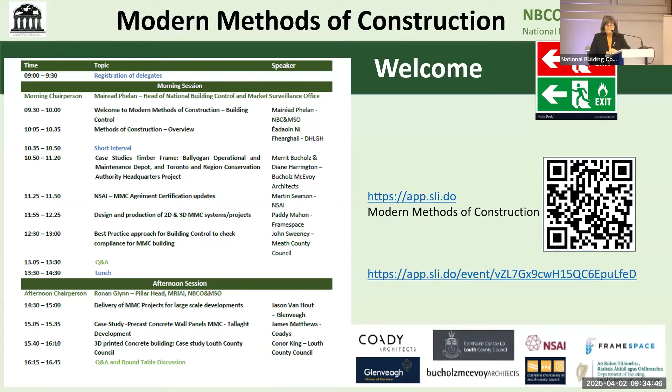As I said, we have a very good lineup of speakers. What we do in the National Building Control and Market Surveillance Office, we're a shared service of 31 local authorities, and they pay us to provide a standardised service across the sector. We are mainly concerned with national building control, delivering building control, promoting a culture of compliance with the building regulations, and promoting a culture of compliance with the construction products regulations, for which we are a market surveillance authority and a competent national authority.

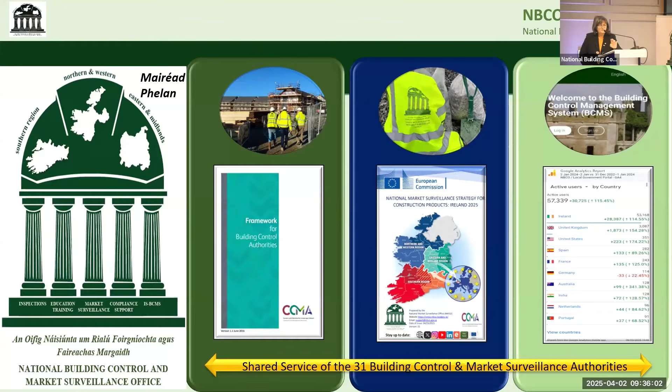We also manage the building control management system, which is the preferred means of administration of building control in Ireland. It's not just an IT system, it is the system that we collect your drawings, your design, your specifications to demonstrate how you're going to comply with the requirements of the building regulations, Part A to Part M.

Now, to put this day in context, lest you forget, we must comply with the requirements of the building regulations, Part A to Part M, and the basic requirements for construction works. That's agreed across Europe: that construction as a whole and in its separate parts must be fit for its intended use, taking into account persons involved throughout the life cycle of the works.

Subject to normal maintenance, construction works must satisfy the basic works requirements for construction works for an economically reasonable working life, and that's 60 years. So mechanical resistance and stability must conform with that, fire safety, environment, hygiene, safety and accessible use, protection against noise, heat retention, sustainable use of materials.

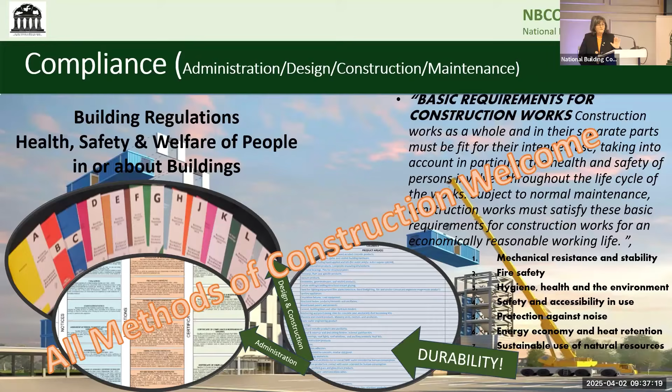So remember that as we go through each one of the presentations today. All methods of construction are welcome, so we don't mind what you build it with, you must conform to these rules and regulations for an economically reasonable working life. And I'm going to remind you again about Part D of the building regulations.

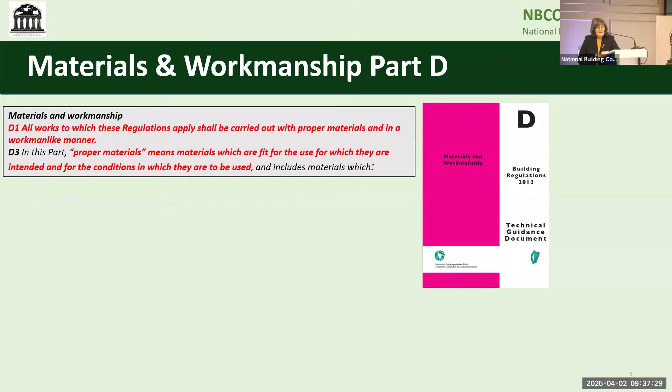Proper materials which are fit for purpose in the circumstances and conditions in which they are to be used. So the circumstances and conditions here in Athlone on a lovely sunny day could be quite different than the circumstances and conditions in West Cork on the same sunny day, where you could have wind, rain and mist blowing in over the Atlantic. All construction products must bear CE marking, comply with the construction products regulations, have a declaration of performance and safety information in use.

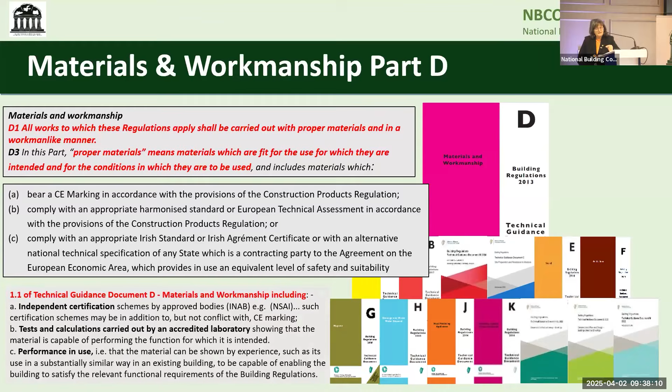And if they don't come within the harmonised standard, you must demonstrate compliance via either independent certification - you'll hear more about that today - tests and calculations, or you can show us by performance in use. So where alternative methods of compliance are being considered, you have a very good information document on the department's website, and consult with your building control authority. There are 31 building control authorities, we're there to help, and you have the National Building Control Office.

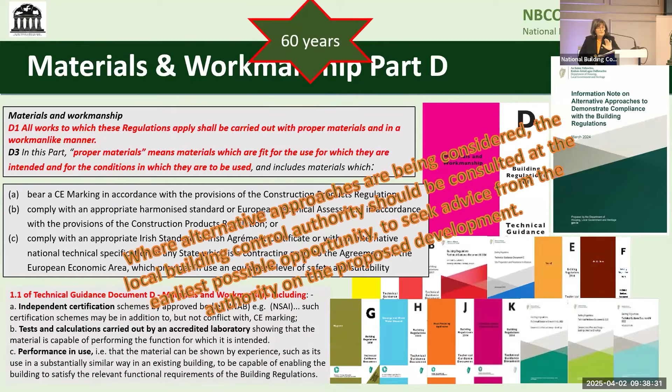We need compliant buildings, for 60 years. We don't mind if you have an Agrément certificate, but the Agrément certificate must say 60 years, and I don't want to be seeing 15 years for this and 30 years for that. It must all be 60 years.

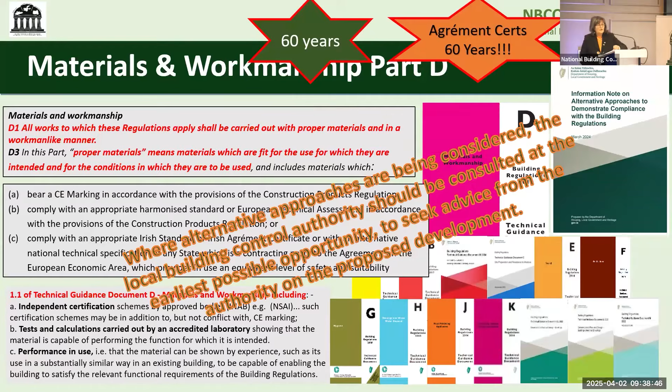Whatever you're connecting your construction parts with, that connection must be 60 years as well, nothing less. Now, modern methods of construction are very good, but what we need to see in the built, finished product should be the very same quality as it leaves the factory. It shouldn't be damaged along the road during transport.

It must be maintained and covered and protected while it's on site. You must schedule your deliveries if that's what's necessary, or go build a shed. They can do it in the ploughing match, they can do it in all these agricultural shows. Build a temporary shed and store it in it until you're going to put it into your construction.

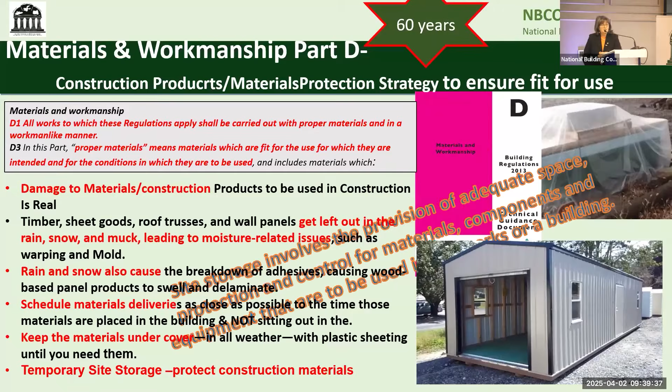Think about it, how you're going to use your materials. 60 years, Agrément certificate, 60 years. Why? What do we want? We want proper materials, we want proper design, we want proper workmanship, we want proper materials fit for use. That's the rules, that's the law.

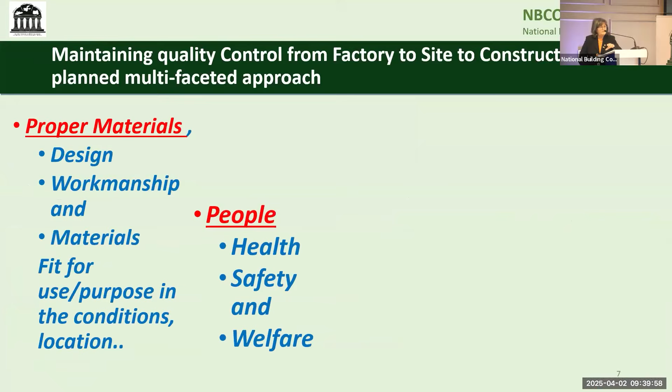Why? Because we're putting people in our buildings, and it's the health and safety and welfare of people in or about the buildings. How do we do it? We need proper planning in advance of construction, clear quality standards defined, rigorous inspection procedures. Very important, the most important way.

How do you stop speeding? Put the guards on the road, inspect. Training competent people, we need competent people. We need to be continuously monitoring and improving our processes to ensure that we have consistent quality, proper buildings fit for purpose.

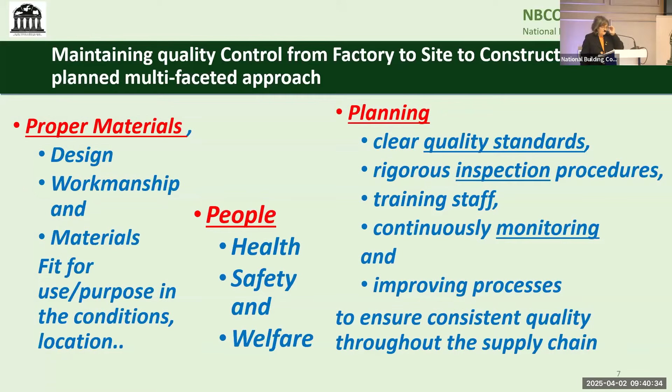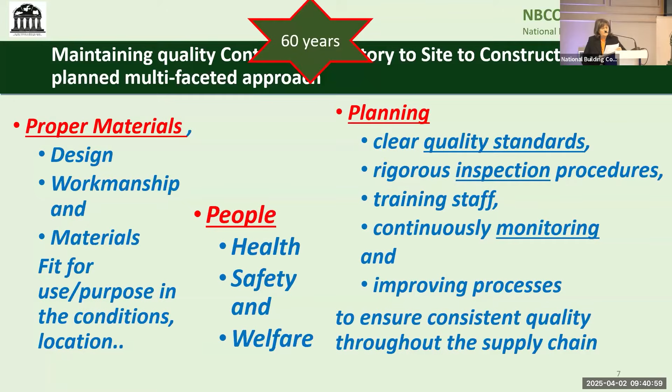Now, I'm going to introduce our next speaker, Ronan. Ronan Glynn is a registered architect. He's a senior executive professional in our office in the National Building Control and Market Surveillance Office. He's head of the training, education and training pillar and the compliance support pillar. Prior to his role, he was in the architects department in Dublin City Council and spent 15 years on Ballymun regeneration. He is very familiar with standard construction details, modern methods of construction, so I'm happy to introduce Ronan to take this.

Thank you. Morning, everybody.

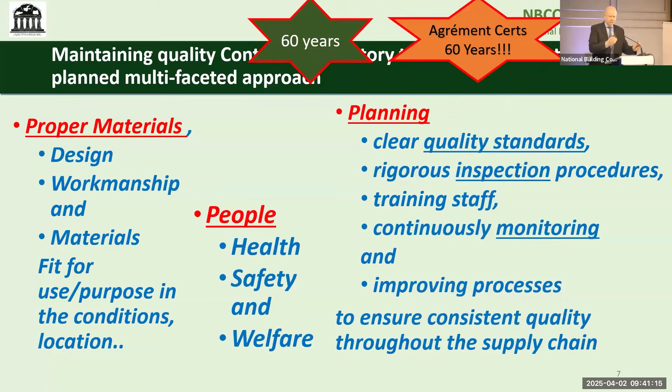So why are we here? We're here from Modern Methods of Construction. There's a good publication from the department, an introductory guide to modern methods of construction. It talks about the benefits: faster delivery in site, higher quality homes, increasing sustainability, more affordability, and more diversity in the workforce. So that's why we're looking at modern methods of construction, going away from the standard or traditional construction.

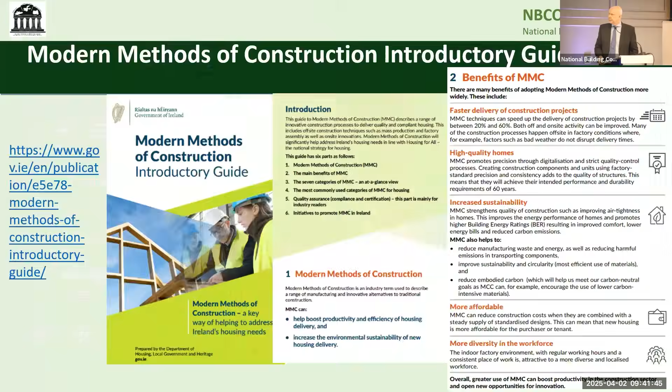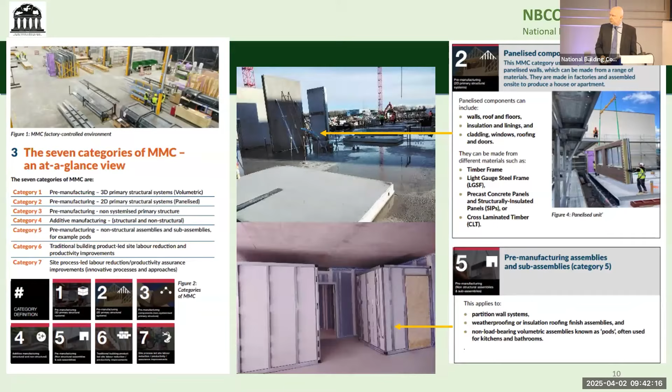In that MMC guidance, there's 7 different types of MMC looked at. We, in the National Building Control Office, along with the department, are looking at how we integrate those into the online assessment. We selected the ones that have structural performance in them. So we're looking at 1, 2, 3, 5 and 7. So we'll go through those.

In the original online assessment, as it is at the moment, as a creator of the notice, you select the type of construction, and there's a list of materials that you can select from, and it's an open list. You can select as many materials as you want within one building, and that was slightly confusing for building control officers, as you might have a building which would have several different types of materials, weren't sure which was the main construction material, and they would have to investigate that as for their risk assessment.

And then the second question that was there was the load-bearing structures that arrived prefabricated, i.e. 3D modular, for instance. So the question wasn't well defined and could lead to errors because people might assume that what they were bringing to site was prefabricated. It may not be the main material used for the construction, so it led to some confusion there. So with the department, we looked at how we would resolve that issue.

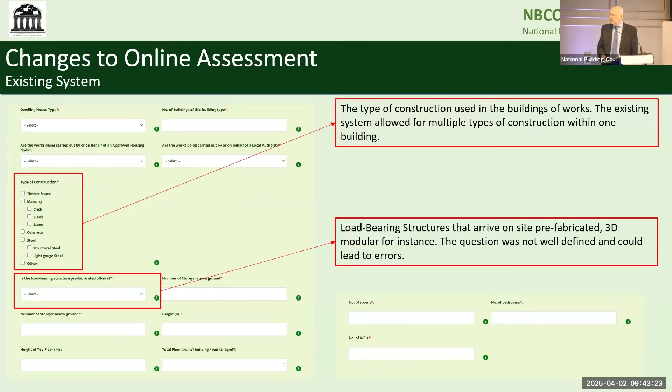So the resolution was that we changed into two new questions. The first question would be the main method of construction, and there'll be a selection available: standard construction, which is non-MMC or traditional construction as some people call it. We have MMC category 1, which is 3D volumetric. We have MMC 2, which is 2D panelized. You have MMC 3, which is non-systemized, and then you have MMC 4, additive manufacture, and MMC 7, which is site process, the improvement of labour on site.

And then from that, we whittled down to 15 most common materials plus another option for the structural elements.

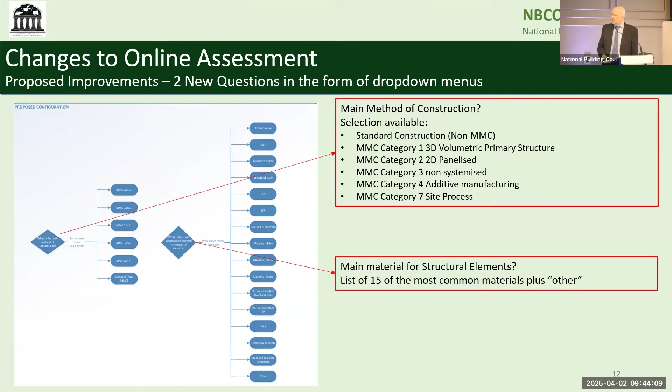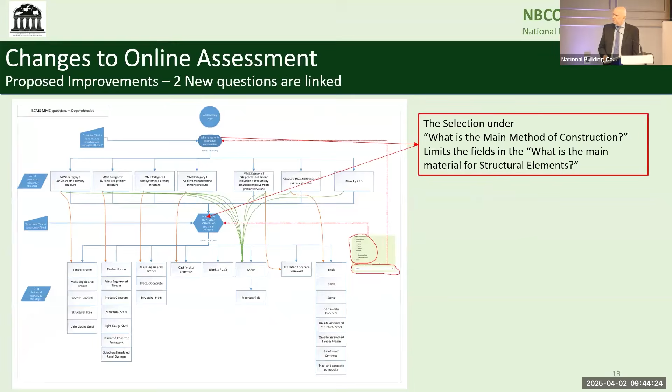So how that would work in practice is you would select the main method of construction as the first question, and then the second question would be limited to what are the main materials for the structural elements. So in practice, you have two selections.

So the first selection, you select MMC category 1, and then the second material list is pre-populated with timber frame, mass engineered timber, precast concrete, structural steel, light gauge steel.

So they will be the common materials used in MMC 1, for instance. If you go into standard construction, you would have the suite of masonry, brick, block, stone, on-site frame construction, timber frame construction, on-site structural steel, reinforced concrete, steel and concrete composite, or other.

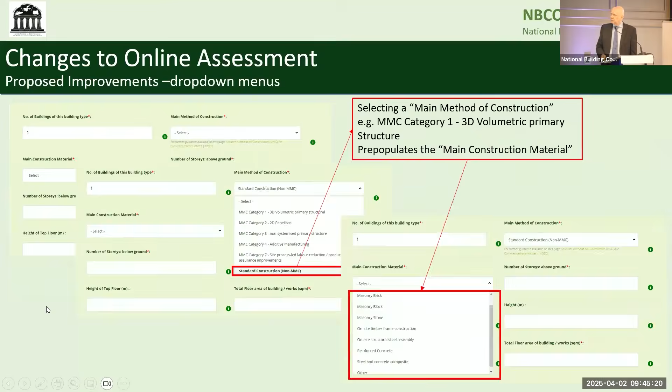And when you look at the main construction, there is a link to a resource page that shows you what the different types of MMC mean in broad terms.

So the first one is traditional, as we understand it: cavity walls, reinforced concrete, on-site processes where you're building it with materials brought to site and constructing the dwelling using traditional methods of construction. You have MMC 1, which is 3D volumetric, where structural elements are basically stacked on top of each other, bolted together, and they form the building.

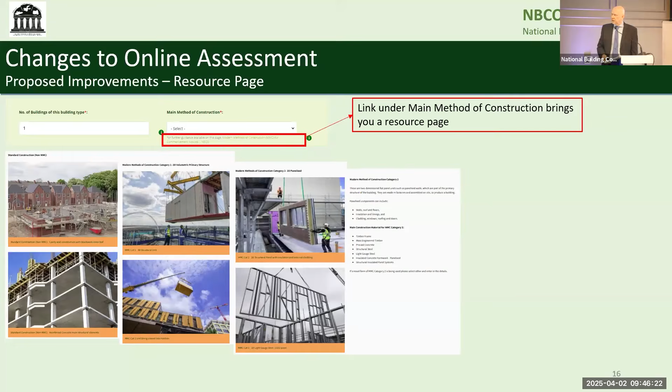And you have MMC type 2, which is the panelized system. So you might have, on the top one, a panel which has all the materials from internal finish to external finish, and they are bolted together to form the structural integrity for the building. Then the second one down is just a steel frame which arrives to site, and then finishes, insulation, etc. are added to it, but they're both 2D structural.

Then you have system 3, which is non-systemised framing. This would be glulam beams, steel beams, etc., which are prefabricated off-site and brought to site to be assembled. Precast concrete would be another version of that, where you have precast beams and columns.

Then you have the additive manufacturing process, which Conor will talk about later on, which is basically a 3D concrete printer that goes around the footprint of the building and prints out the footprint using a special type of concrete.

And then you have MMC 7, improvements to site works, which in general in this country is only ICF, insulated concrete formwork. They build a lift of polystyrene and plastic formers, it's poured in with concrete with the required reinforcement, and that forms your building.

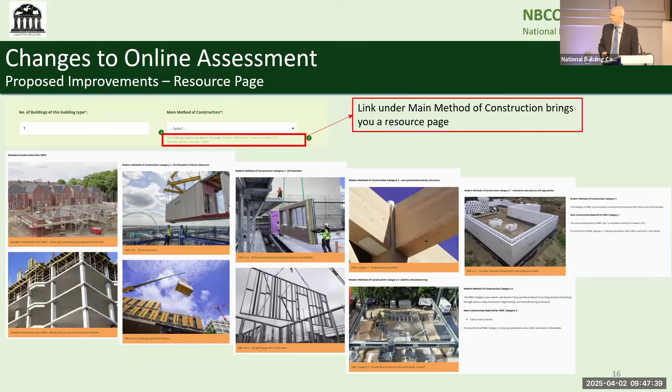So those are the types of MMC that we are looking at, plus standard construction under this selection.

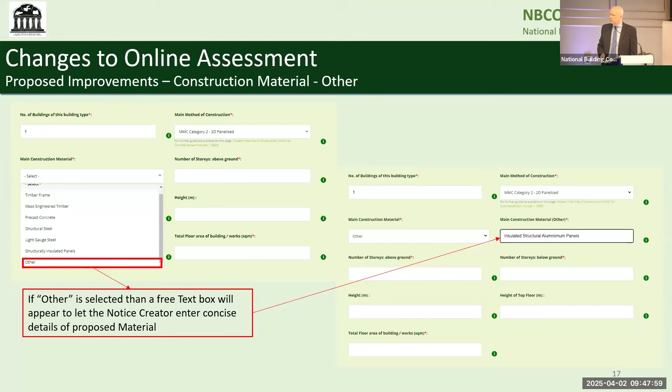The other selection is 'other', so you can still select other, and if you selected other, a free text box will appear allowing the notice creator to enter a concise description of the proposed material. So in this case, it's insulated structural aluminium panels, which aren't part of the original suite of materials we looked at.

So again, the changes will also be on the front end. You will see an old notice still showing the old form of construction, and a new notice will change to represent the MMC. It's not retrospective, it only works from the date it's applied, which will probably be later this month.

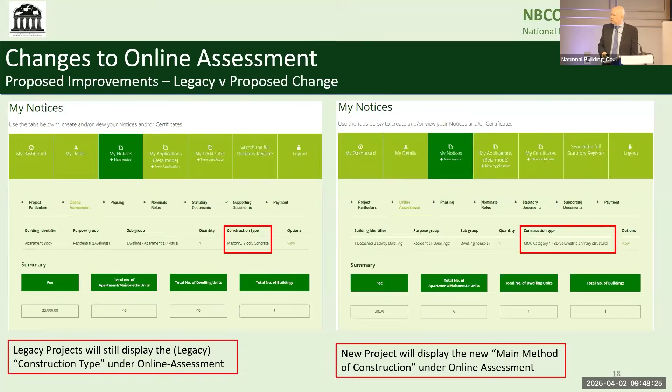And on the building control side, if you look at a legacy project, it will still show the old materials. On the left-hand side, you see the three materials are shown there, showing you what the materials are. And on the right-hand side, it shows you the new MMC type 1, and then the type of material, which is timber frame.

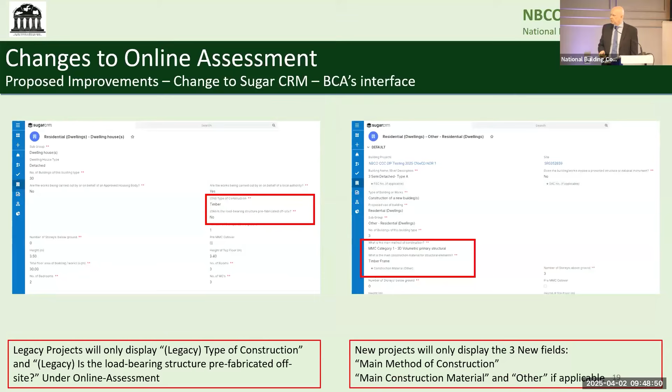So just a quick spin through the different types of construction we talk about. Standard construction, non-MMC, is generally masonry construction, as described in TGDs for non-complex buildings. Most of the TGDs would refer to masonry construction, and the details will complement that building type. So for compliance, you'd be checking if the building details are in accordance with TGDs.

Obviously, you check if materials are in accordance with Part D, as Mairéad already mentioned. Check if the material is properly stored. Check if the works are progressing in a workmanlike manner, and check if the details are in accordance with the ACDs.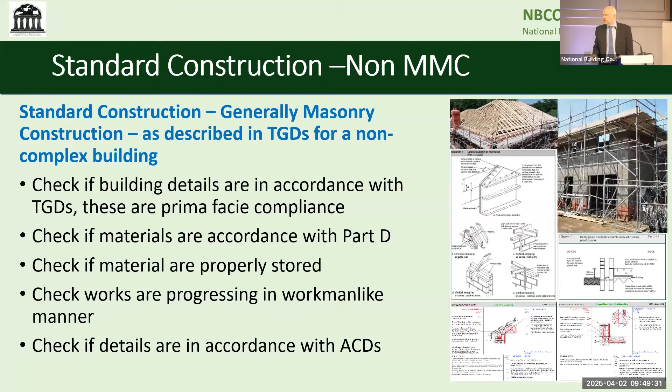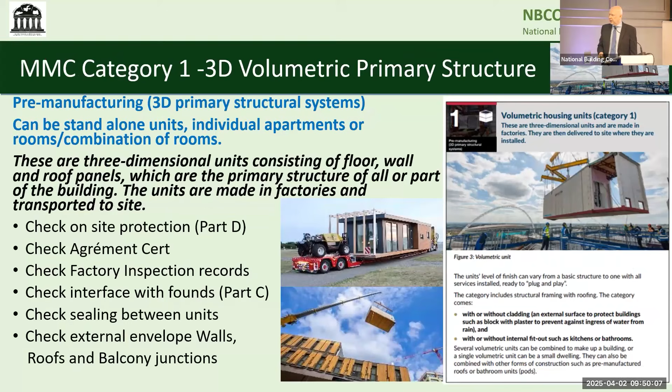MMC 1, 3D volumetric: three-dimensional units consisting of floor, walls, and roof panels, which are the primary structure of the building, made in factories and transported to site. As Mairéad talked about, you're looking at on-site protection, Part D, checking if there's an agrément certificate, checking for factory inspection records, the interface with the foundations, Part C, how it's actually being placed on the ground, where is the DPC, that kind of stuff. The sealing between different units, and how the external envelope - the walls, the roof, and the balcony junctions - are detailed out.

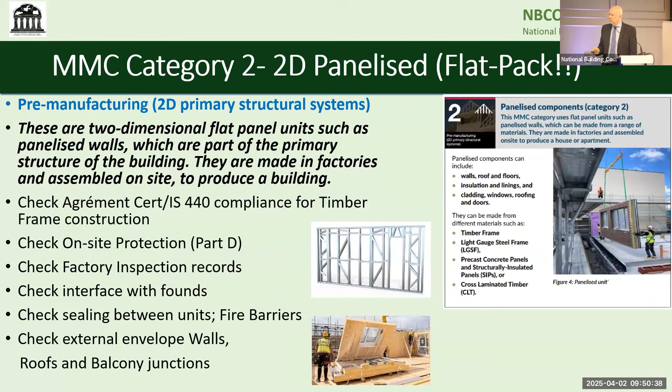Then we look at 2D panelized, they're flat pack - basically 2D panels which arrive on site and are assembled. Again, you're looking for an agrément certificate. For timber, you have IS 440, which is the standard. You'd be checking again for on-site protection, factory inspection records, checking interface with foundations - where the DPC is, where is damp getting through - sealing between units, fire barriers, etc. Checking the envelope for junctions.

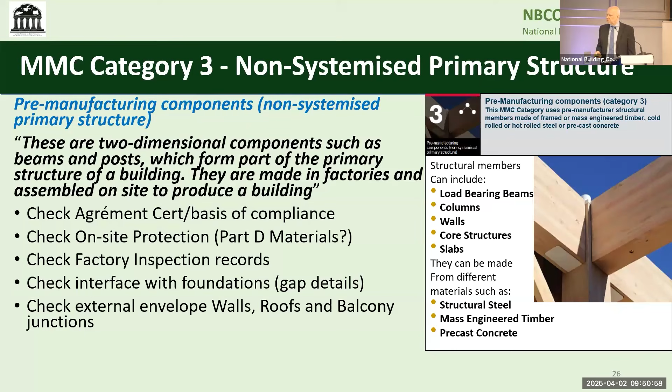Systemized, non-systemized primary structure - is there an agrément certificate, or what is the basis of compliance? Checking for materials, protection on site, factory inspection records. Again, interface with foundations, how are these put together? Again, the external envelope of the building.

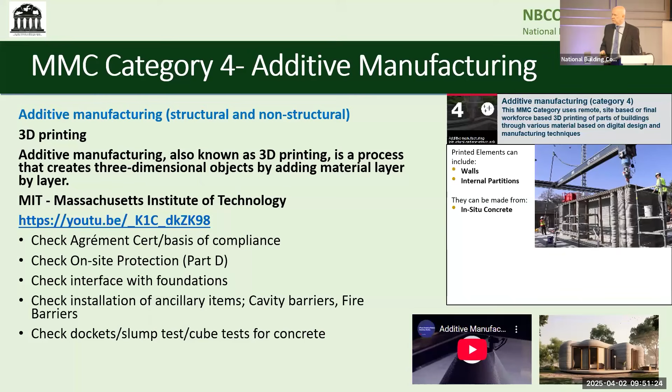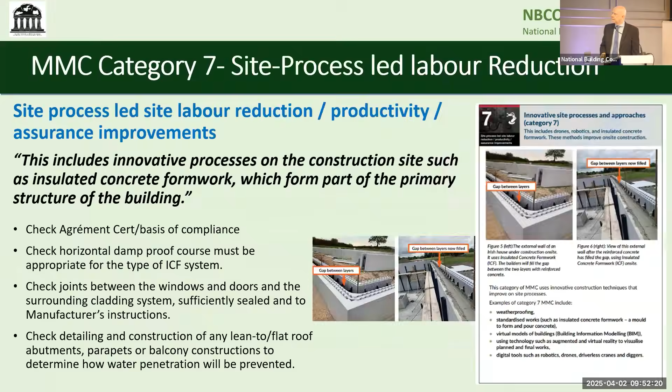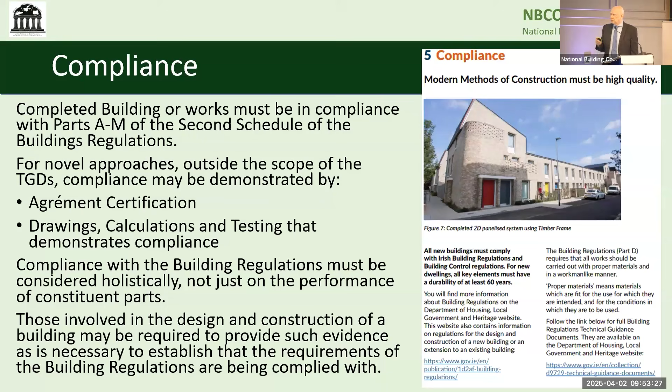Again, if you're looking at compliance with MMCs, the agrément cert will show you what the durability is - it tells you 60 years, as Mairéad talked about earlier - and the durability of the render system should be 60 years as well. There's no point having a structure and then putting a render on that only actually lasts for 30 years, so they should be 60 years at the minimum.